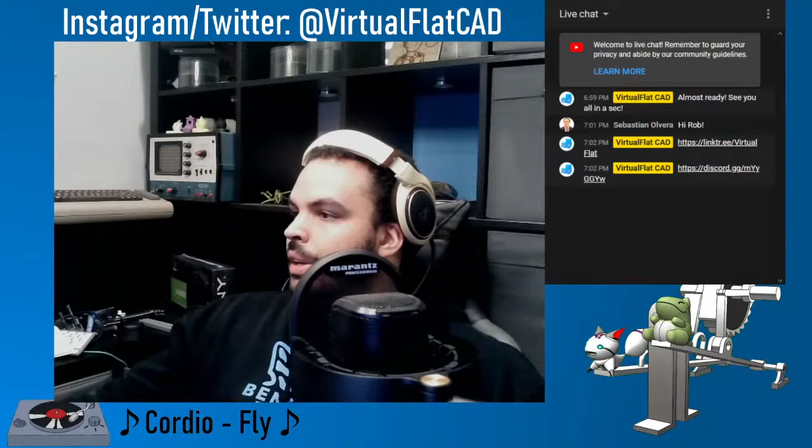But yeah, a couple stuff been going on there. Let's check out what we've got. So, oh yeah, let's change this over to the main thing. Doing pretty good, and maybe push that up like that. And it's looking pretty good. I can actually grab this thing. There we go. Now we're cooking with gas.

So, yep, this is my Discord server. We can see we have quite a few people now, which is totally awesome. Yaya's been waiting for this for a while. Well, I don't think he waited for this specifically, but he's been awake for 33 hours and is excited to join us in the stream. Now that's dedication. But in all seriousness, man, you should get some rest. It's not a big deal if you miss out on my stream. This is always recorded. And I think the thing I'm going to do from now on is just post the entire stream as soon as it's finished, pretty much. I did that last time, and I think it worked pretty well.

And yeah, Virus is also excited for the live stream, and he's excited to be picking up skills from my live streams to help him with the 3D design challenge, where you're supposed to take some of Da Vinci's drawings and render them in 3D. And apparently Dassault Systems is running that contest. We might dip our toes in there too. I might try something out, but I do this for fun, and the fact that you guys are hanging out with me right now is enough incentive to do models like this.

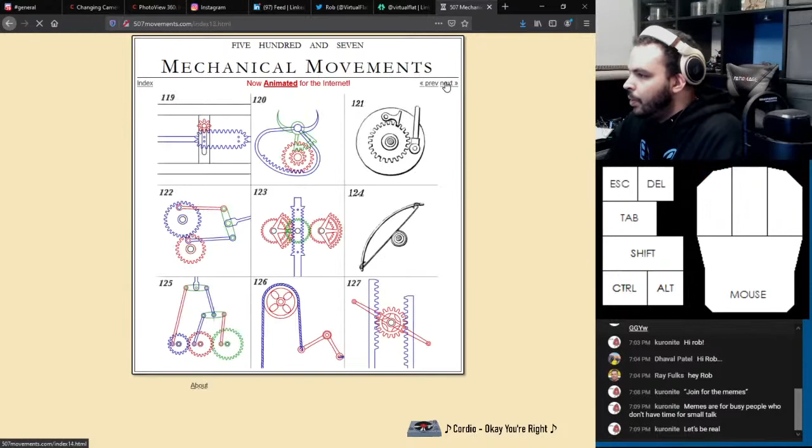This one's interesting. I have to keep taking a look at it. I think we can find something interesting. What is this? Steam Engine Governor. Now that's an awesome name. Operation is as follows: on engine starting the spindle revolves, carries round the crosshead, to which fans are attached. Interesting.

Oh, so these are kind of like how music boxes actually have similar governors that work on a similar principle. I don't know if you've ever seen a wind-up music box, but if you look really closely, they have a component that looks like a little fan that rotates around. What that fan does is it basically catches the air, and the air resistance is what slows down the mechanism. If it wasn't for that governor, you'd wind up a music box and it would just play a flurry of notes in like 3 seconds and be done. So

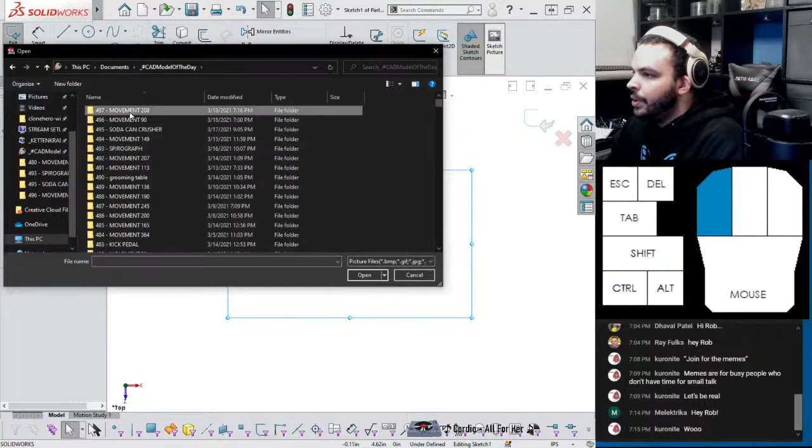Yeah, I don't know why I didn't have SolidWorks started up, but let's do that. At least we get to watch my custom splash screen. Alright, so part. And let's start on the top plane. Grab the sketch picture. Put that in the middle the best we can. Stretch that doodad and make it 12 inches. We'll make that 1 foot across. That's totally fine.

Oh, you know what I found out that's pretty cool? I accidentally stumbled onto this feature. If you right-click a sketch, you can actually say make reference sketch, which is awesome because you don't, well, maybe I just blew up my theory. Where's the origin? I was about to say you can't mess it up, but I just did. So I guess that only applies to sketch entities. Okay, yeah, I goofed it up. Turns out I gotta do a little bit more testing on it.

But apparently, if you want to draw like a layout sketch, and you know you're not gonna edit it again, you can right-click and say make reference sketch, and that'll prevent most accidents, I guess we should say.

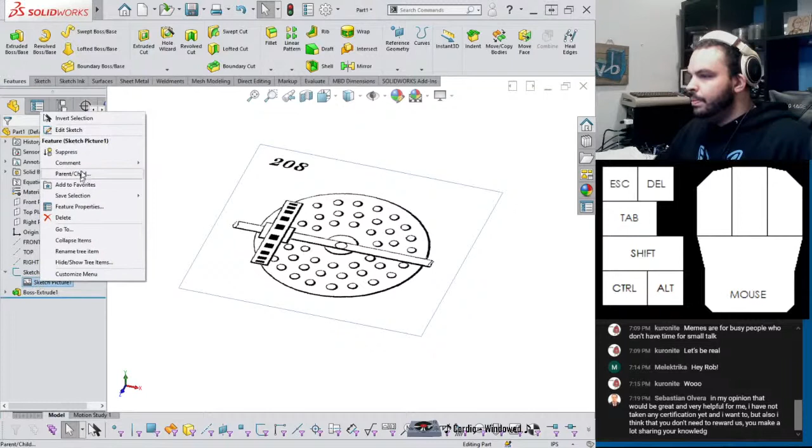So yeah, actually, let me see if I can. Wait, now you're not gonna let me edit it? Okay, there we go. I want a little bit of transparency, so I'll say full image, 60%. So you can actually make the sketch pictures transparent, but apparently that does not make them intangible. So I'd like to click the top. Well, I guess I can click top plane.

Okay, this is going to be very interesting. So how many instances do we even have? So 1, 2, 3, 5, 6, 7, 8, 9, 10, 11, 12, 13, 15, 16, 17, 18, 19, 20, 21. I'm actually going to guess 20 because the pegs are obscured here. I don't know how many there are. But just to kind of round it off, I'll try 20 and see how that looks. Let's get rid of all those points. I'll just start with 1.

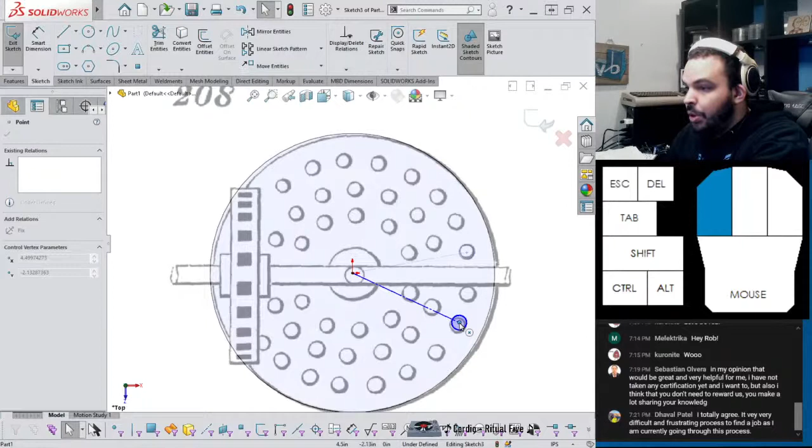Dhaval saying, I totally agree, it is a very, very difficult and frustrating process to find a job, as I'm currently going through the process. Yeah, hang in there, brother. I've been there too, and it can be very difficult, especially that a lot of recruiters and hiring agencies are not respectful of your time as an applicant. It really stinks to see that you spend all this time applying, writing cover letters and stuff like that.

If you don't think I'm the right guy for the job, fine, but just sending a message that I didn't get the job, I think that should be the basic bar. Even if that's done by a robot or an automated email, it is still kind of insulting, but I'd take that over nothing. Don't leave me wondering. But yeah, I definitely think it's broken, but I'm not really sure how to solve that problem.

So we'll do something like this.

It looks like kuronite is in the same boat. Yep, hang in there. I'd like to think that I'm putting together some good lessons for you. So hopefully you'll be able to prove your skills when the time comes.

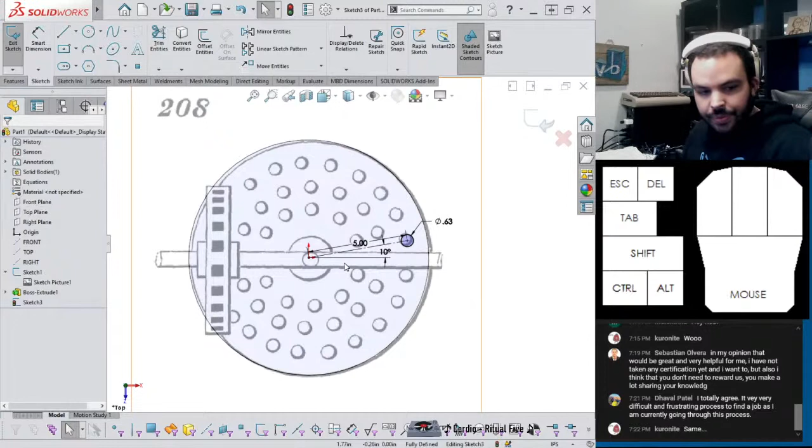I will tell you guys a funny story though. This was when I was graduating school, in the same boat as all of you guys. I was very frustrated with the job application process, and I was just sending a whole bunch of resumes out. I shotgun spread my resume anywhere that it would fit, pretty much. And I applied to this one company whose main CAD program was Autodesk Inventor.

But they still decided to give me a call and have me come in and talk to some of the guys, even though at that time I was a certified expert. It's like, okay, let's check this guy out. I talked to the hiring manager, we get along well. We talked to a VP of the company, we get along well. And then I talked to the head engineer. He was like, okay, we're gonna give you a proficiency test for CAD. I'm like, great. I'm primarily a SolidWorks user, but how different could it be?

He gave me a little assignment where there was an assembly with a table with a square top with 4 legs, and he had this foot in a part file. It's like, okay, put these feet on these legs. And before I even touched a mouse, I asked, so what's the design intent with the foot? Are we centering it? And he looked at me like I was speaking some alien language. Just put the foot on there. I'm like, but I need to know how you want me to put it. What are the expected design changes?

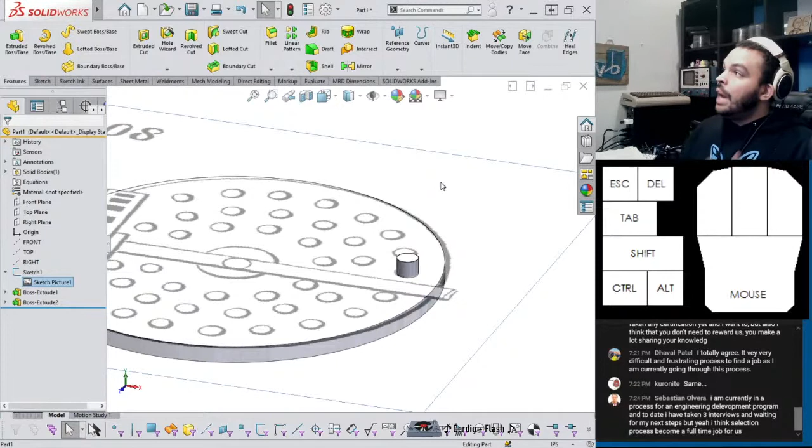It's like a red flag where I'm bringing up what I think is a valid concern with how this thing's being put together, and you just kind of brush it off. You don't want to work with someone like that anyway. But I was a little annoyed by it, because he kind of showed me like I've never seen a computer before. And then after that, I talked to the hiring manager again. We parted ways, and they never gave me a call again. And that was that. So yeah, I've been in the same boat too.

Yeah, Sebastian saying, I am currently in a process for an engineering development program, and to date, I've taken 3 interviews and am waiting for my next step. But I think the selection process has become a full-time job for us. Absolutely. Applying for jobs is just brutal in general, because do you spend a lot of time on few applications to maximize your chances, or do you just shotgun, shoot your shot, spread it as wide as possible? And I can't give you an answer to which is better or worse.

I've done it both ways, where for certain jobs, I will take my resume and curate it. So, for example, if someone will say something like, CAD experience required, video editing skills a plus, then I will reshuffle my skills to say SolidWorks, then Adobe Premiere Pro, then Camtasia. And maybe another one is like, we'd like engineering drawing skills and CAD work. So then I'll put SolidWorks, and then some kind of related experience, like I've done patent drawings before. I'm sure you want me now. So I've done that too.

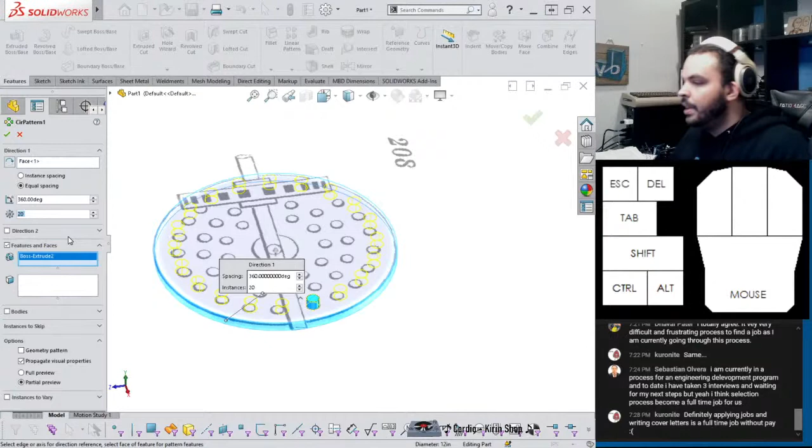And yeah, I don't know if any of it makes any reasonable difference. I'd say do what feels right. If your resume is really generic and boilerplate, you might want to sprinkle in a few details that differentiate you from the rest of the pack. But I wouldn't go too crazy with it either. kuronite saying, definitely applying to jobs and writing cover letters is a full-time job without any pay. Yeah, that's the important bit. There's no pay. Mad stinky, I tell you.

Man, I don't know how many instances to put on this thing. Here, I'll leave it at 20. I'll stop messing with it.

But I believe in you guys. Hang in there. Especially with the current world events, every economy ever has contracted. It's just brutal. Now, I do consider myself to be very, very fortunate to have a full-time job right now to keep all the good stuff going. Eventually I think I would like to move full-time into YouTube and streaming and stuff like that, but I'm a long ways away from that. For now, this is just something that I do because I like it.

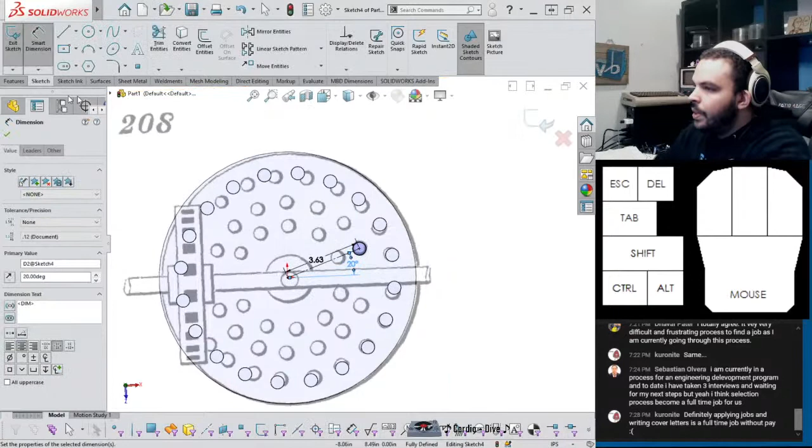Actually, I might. If I double click this, yeah, this will change this up to surface. So that way I can have this one feature control all the peg heights, and I think that will be very helpful because I don't even know how this thing's gonna run. It'll probably run like garbage, to be honest, but I'm here for it. Looks pretty good for that. And actually, what I should be keeping track of: it started with 5, went down to 3 5/8. So that's a 1 3/8 subtraction every time, pretty much.

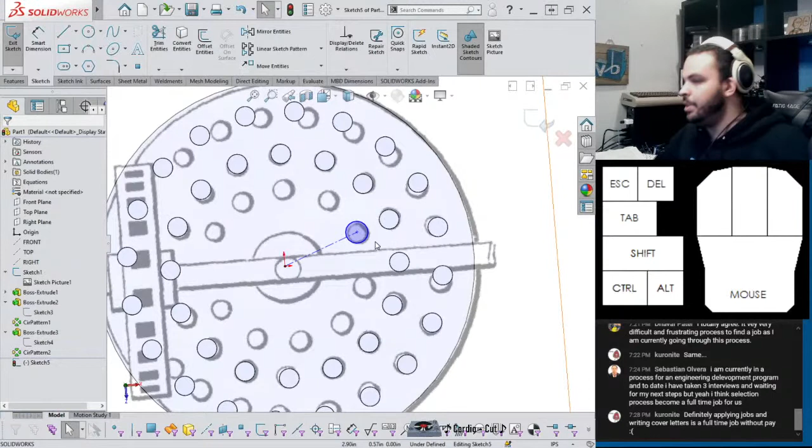And something that I probably should be doing too, like I did in my last 12-hour stream when I hit 2,000 subscribers, which felt like a long time ago but really wasn't. It's crazy that I'm almost at 3. I kind of stopped focusing on the task at hand and started checking out people's work. Maybe I'll do that again, where I show off people's work in the Discord. There's a guy, EMW Designs, who said he was using my impressions of his animations during the 12-hour stream to say, look, this guy knows what he's talking about, and he said my work's good. And I'm cool with that. I'm here to back up my homies.

3.625 minus 1.375. Okay, so it's gonna be a little bit different than the sketch, but I think the sketch is done pretty freehand, it would seem.

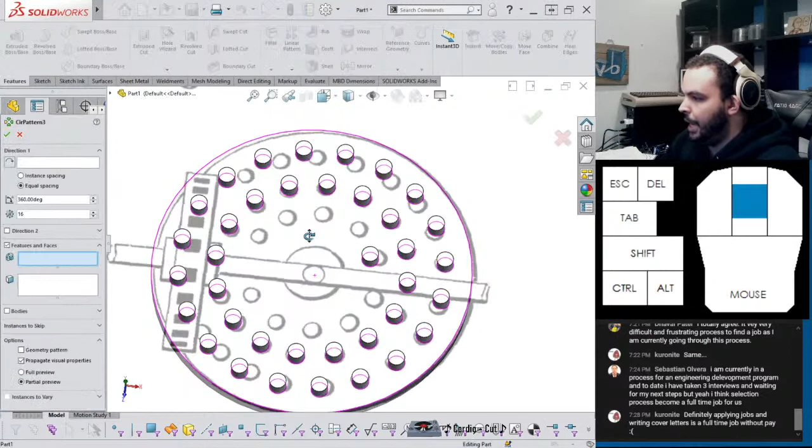So yeah, I'll be taking liberties and kind of squaring things up. Yeah, 16, sure. Why not? Probably should get it saved. You know, that's always a good call. Movement 208.

Bruh, I really don't. The more I think about this, the more I realize that this thing is gonna be hot garbage. You know, but maybe I'll be wrong. I put this thing together and animate it, and something amazing happens.

The lines you have in your operations tree, front, top, and right are axes? Yes, they are. So here, I'll take a little detour. So I set up my part template such that not only are the 3 main planes present, but I have these 3 axes, and that makes it very convenient for stuff like that.

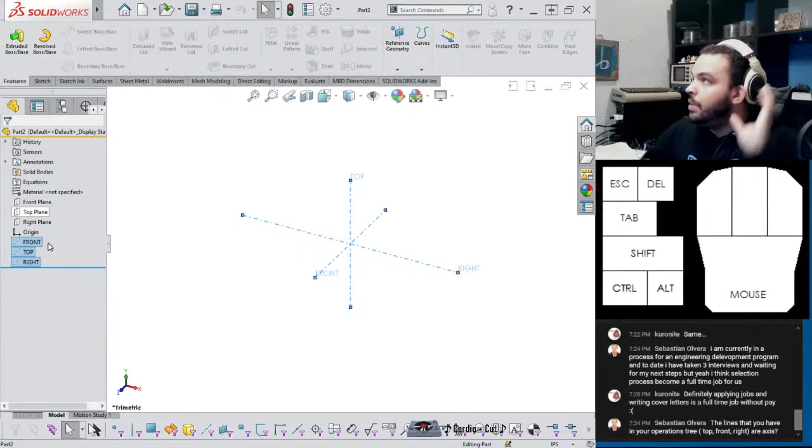And that's something that I hear from people who are transitioning from Creo to SolidWorks, for example. Apparently Creo files will have the axes by default, and then they grumble and they say, but SolidWorks doesn't have it. I'm like, yeah, I guess, but it's really easy to set up. So you know what you would do. Let me see if I can get like a tutorial document. Yeah, so for example, here's a part template that does not have it.

So the way I did it is you can select, for example, the front and the top plane together, and the intersection of these planes will make an axis. So you can go and click your axis and then click that. And the way I name this, I think in Creo they will call this the axis that it is parallel to, so they would call this the x-axis or something like that.

That's fine, but what I like to do is name it after the plane it comes directly out of. So if you notice the right plane and this axis, the axis is perpendicular to the right plane. So I would name this right. That might sound weird to you, but it is strangely intuitive to me. And I think that really matters.

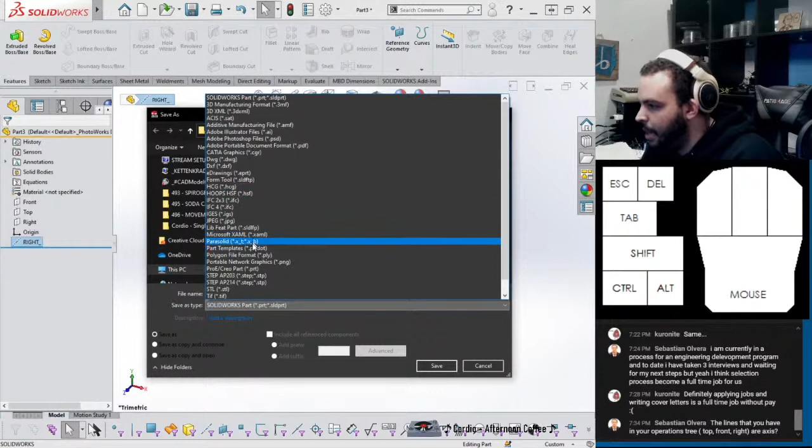And I guess it's looking at my other files, right? Save it like that. So I would name that right. So this is the axis that comes out of the right plane perpendicularly. But yeah, you can name that whatever you want. And then when you're done with that, you'll go save as, be something here for template. It's probably here somewhere. Bruh, where is template? A part template. Here we go. I would expect SolidWorks part template.

And actually, I think I may have goofed this up, and not in the way you're thinking. So another story time. When I was at SolidWorks World for I believe 2019, the year preceding the rearrangement of these file extensions, what it used to be is you would hit save as type, and all these would just kind of be random. My guess was it's just order of implementation when they developed SolidWorks. Like, oh, this is a new file format, and it just was at the bottom. And SolidWorks, rightly so, said, this is a little bit confusing. How about we alphabetize them?

And so in one of the alphas I did, they showed me a version of SolidWorks where everything was alphabetized. And I mean strictly alphabetized. That means if you wanted to save as a SolidWorks part, because you're in SolidWorks after all, you would actually have to go through the middle of the list. It would be right next to step file, pretty much. And I looked at that and I'm like, I don't think that's very convenient. I think you should put SolidWorks stuff on the very top and then go alphabetically. Far be it for me to say, but I think my comment went through.

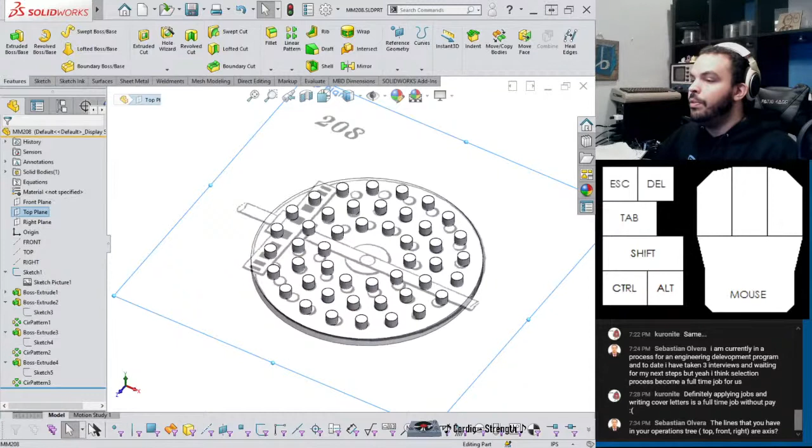But yeah, as you can see, it comes pretty handy. And because the axes are dependent on planes which can neither be destroyed nor modified, they are perfectly robust. You can delete the axes themselves, but there will never be an error where this will have a warning triangle that says, hey, one of your planes is missing. That's impossible, because I used the actual planes themselves to define it, so I would recommend doing it in that way.

Time to do the wheel now. And here's where things are gonna get screwed. I need to make this wheel such that it will accept spacing from each of these, I guess, rings, these rows. Oh my god, this is such a weird idea.

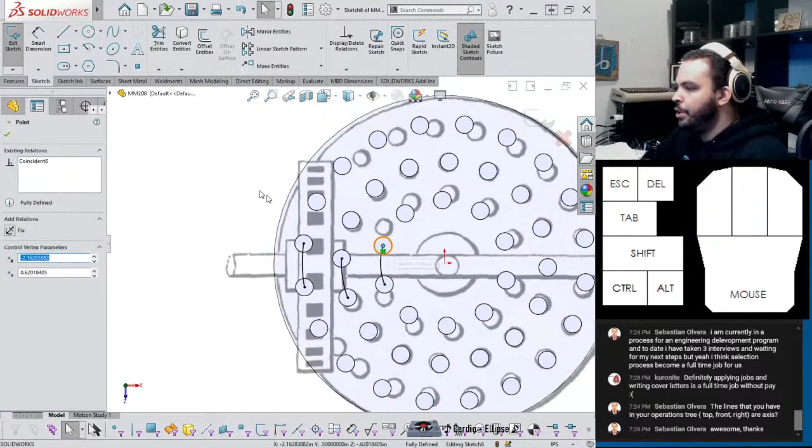Can you give me the midpoint, please? No? Cool. Okay, there we go. Alright, so, drew that. I love it when it flips the other way like that. So that distance, and then... So all these three distances need to be approximately the same. If there's a little bit of slop in there, I might be able to make these square holes wider to accommodate them.

But let's see. I get smart dimension and then select the endpoint, and then the arc itself. I should get arc length. That's how you get arc lengths. And the red is not an error. Actually, let me just change that right now. I did it for a project one time and just never bothered to change it back. I think it's these. If I go to color scheme and then dimensions driven, change that back to gray.

Okay, now they're not that noticeable, but I'll just drag them out here. It'll be fine. So you can see 1.42 to 1.41. So these two arcs are approximately the same. This one is a little too wide, so maybe I'll add an extra instance. So this is that first pattern. So back to 21 that I originally counted. Let's go back to the sketch. So 1.5, maybe add an extra one, honestly.

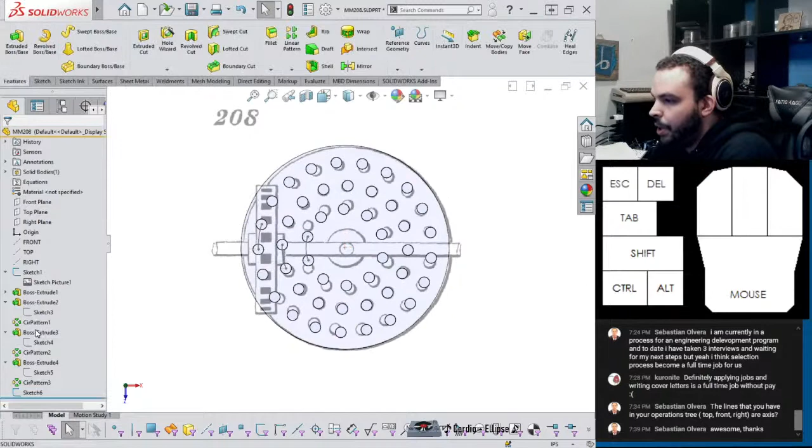Rebuild. Go back to the sketch. And that's actually, I think, right on the money, because now we have 1.41 to 1.42 to 1.43. So, 1.42, plus or minus 1/100th of an inch. I don't think we're going to get any better than that, honestly. Not unless I do some kind of driven sketch, but whatever. We'll just see how this goes. I'm not trying to go too crazy, but also give this thing the best chance it has to actually work.

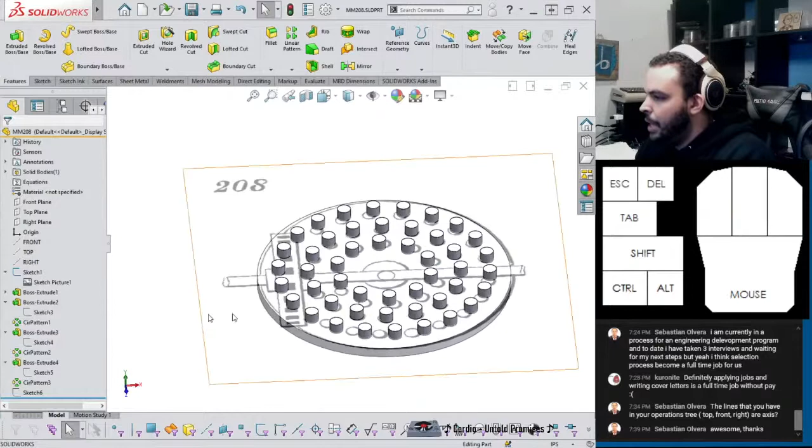Alright, so let's make this disc. And I think I'll accomplish that by sketching on the front plane, and I'm going to do it as a revolve. We'll just do something like that, maybe. Homie, can I get that midpoint? Well, actually, shoot. If I can get this centered where I need it to be, I can actually just move it in the assembly. But in order to do that, I think I'm going to borrow this helper sketch that I was using from before.

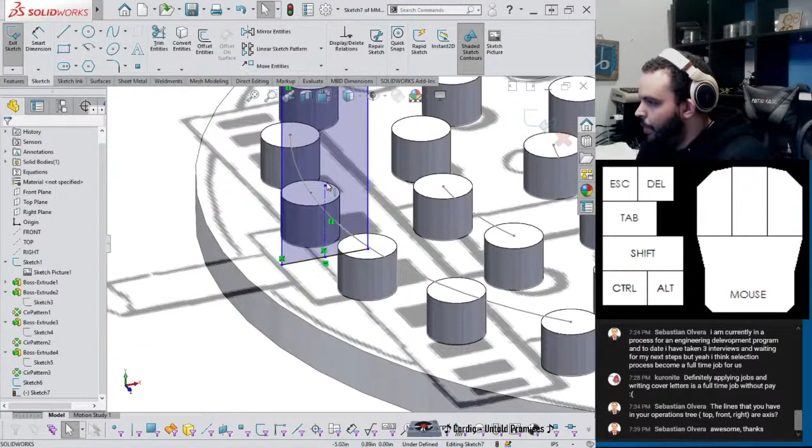So I'm just going to extend this out like this. I don't need its dimension, but I do need its presence. So now you see we have this thing going through here. Grab a center line, snap that to the midpoint, make that vertical. Actually, where's my sketch relations? There we go. So midpoint, vertical, and then this point and this path should be pierced. And that should move it exactly right in the center of where this would be if this was rotated just a little bit more.

A clean 1 inch, why not? And I'm probably gonna have to test around with this value, honestly. And then I can just go ahead with a revolve, like this. And I'll avoid merging the result. Immediately we have a problem here, because that's not gonna fly. Just gonna have to make it a bit smaller, I think. It's still... oh my god, I don't think this is gonna go well, at all.

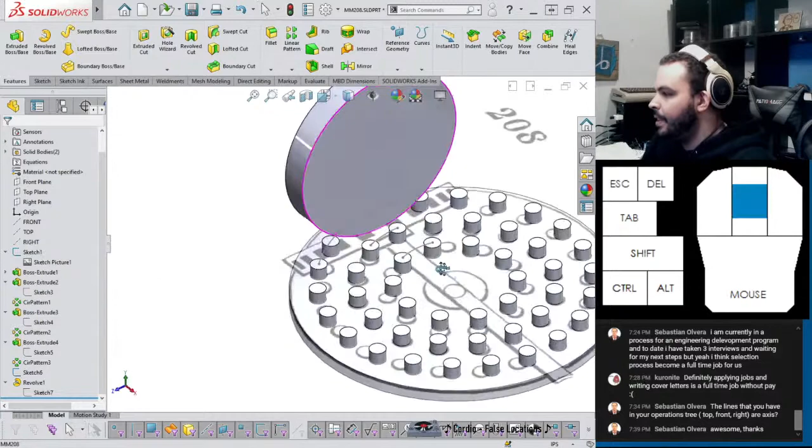Honestly? This can sort of work, but not as pictured. So this has sort of discrete holes with a wall here. I don't see that working at all, especially because this is coming in at a curve. And there's no way it's really gonna line up in there, even if the holes were oversized. They would have to be way oversized, or that, I guess I'm gonna call it a pinion, would have to be very small, or the main wheel would have to be very large so that they approximately come in at a straight line.

But there's another solution here that I'm thinking of, and I think of honestly just knocking out this wall entirely. That way, it's honestly like a tooth of a gear.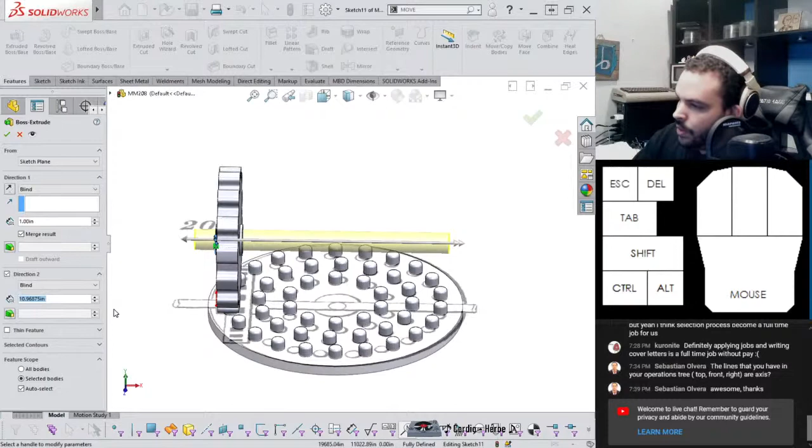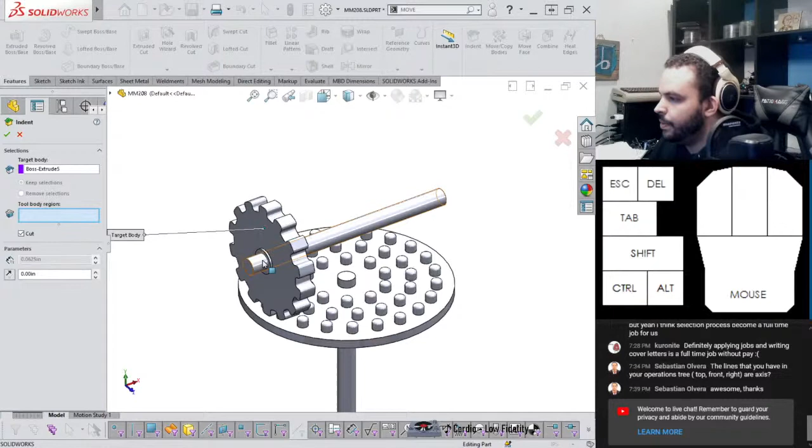Yeah, I was trying to merge the whole thing together for some reason. Well, actually, I changed my mind about merging this. So let's uncheck merge. But also we still have to make the hole, so I'll do that with indent. But yeah, I think I'll keep this in place. Alright, I think it's time to put this into an assembly and start trying to animate this madness. Bodies. Actually, if I'm gonna leave this here, I'd want that, you know, fixed. Yeah, so let me do a bit.

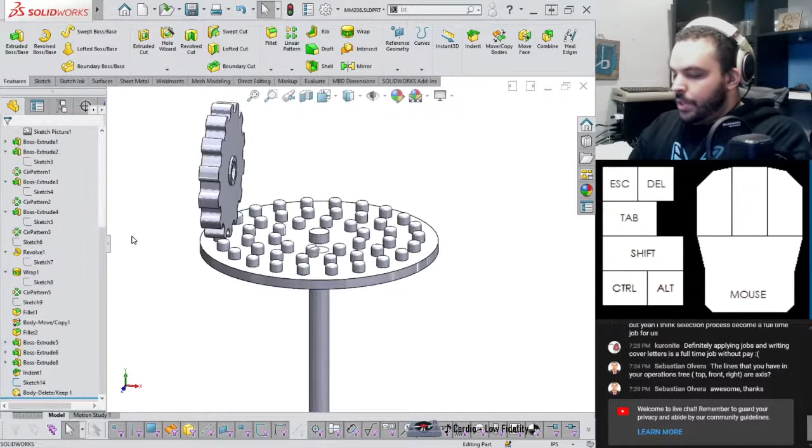I want to leave it in the part file, so a cool way of doing that is you can get your delete/keep body command. This will delete bodies, but not the features. This is just to get rid of the body. All the features that create it will still be there, so I can just turn that off and get it back. Now save bodies. Consume cut, sure. And then MM208 ASM. Okay, so now we should have this part file, but if I turn this off, it's all back. Look at that. Wow. Isn't that amazing? Okay, now we can just put this in here.

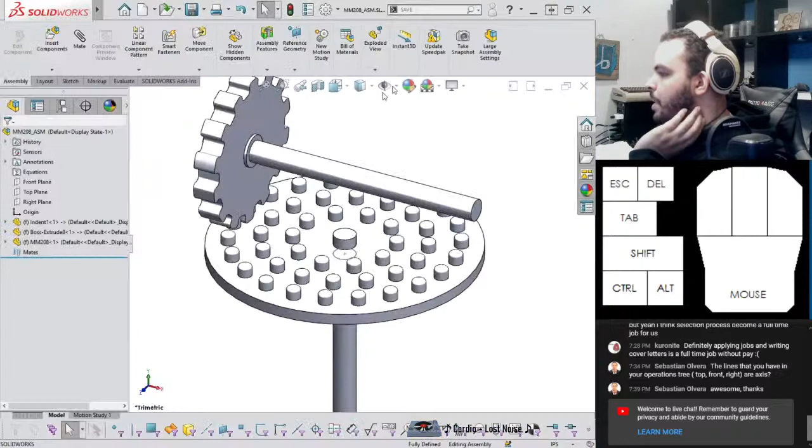Now, I wonder what drives what? Does the article specify anything? Or vice versa. You could do either. You can drive the cog and spin the plate in different directions, at different speeds, or you can spin the plate and drive the cog at different speeds. What would be easiest to see? I think I'm gonna drive the plate as the input, and then this as the output, and then I could even produce a chart too, just to see the speed changing. But before I get to that, I do need to float all of these guys and start putting things together.

Alright guys, we're done putting things together. Was it quicker than you expected? So let's test. So that should be able to spin. Great. So this should be able to spin and slide along. And indeed it is able to do that. Save, and then the real fun begins.

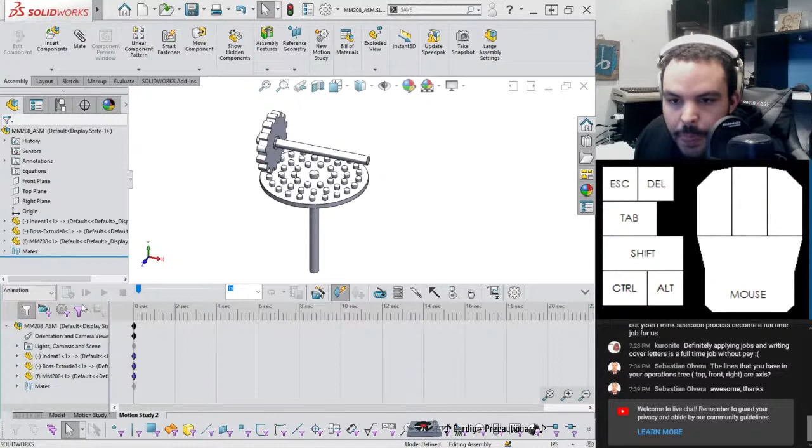Music's going nuts. Turn that down. Okay. There we go.

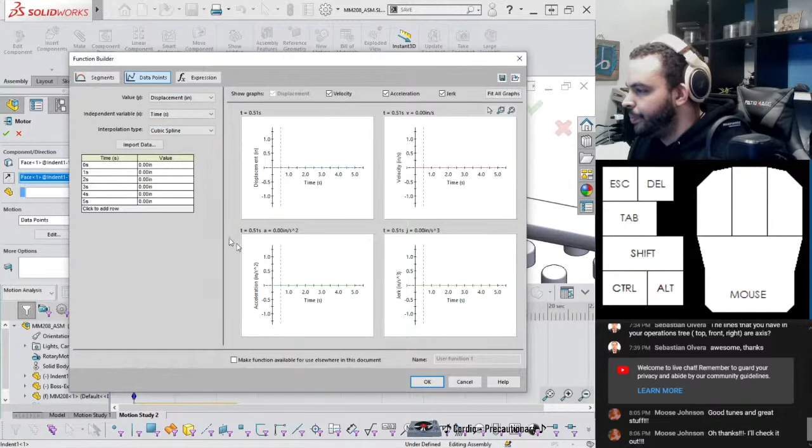Yeah, we'll just give it a bunch of zeros, because first I want to test if there's a motor on this, will it fully stop this in place. Okay, so that is doing what we want, because I know when you put a motor and specify 0, that's basically the same as locking it in place with a mate or something like that. But I'll also use that linear motor to actually engage the different drive modes, which I'm sure will be fun.

I'll probably make this whole animation 15 seconds long, so I'll drag that all the way out like that. And back to linear motor. So I'm just going to put zeros all the way to 15. So it was 1.375 or 1.38. That's cool.

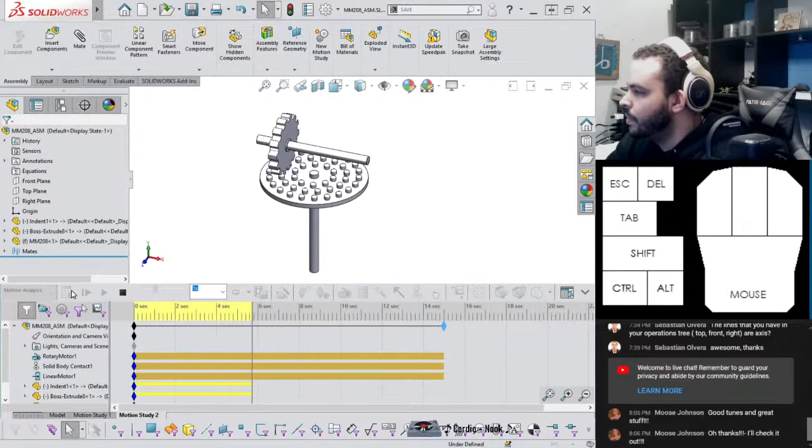So the Akima spline should give it a more gentle transition. So it looks like it's starting over 1 second. So let's try that. So it'll move forward and then it'll move back. But this is just for proof of concept. That is interesting. That wasn't as bad as I expected.

Will you check it out, Moose? Oh, thanks, man. I know he'll appreciate it. He loves when people check out his music, so, you know, I'll appreciate that too.

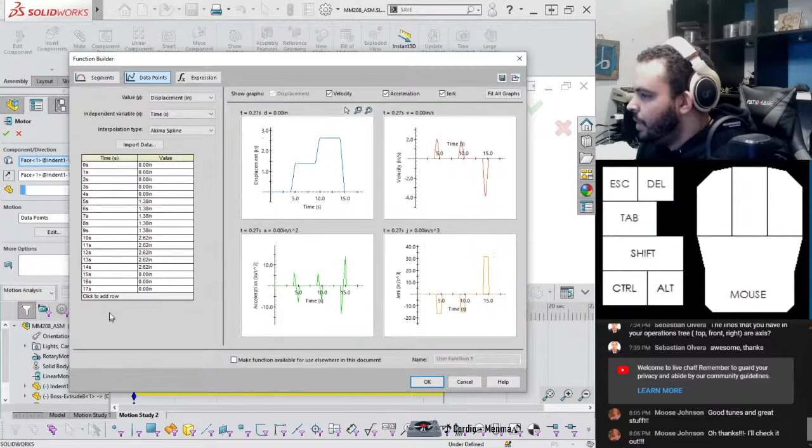And actually, the amount of times I say "and actually," yeah, I'll add some extra zeros to make the Akima spline behave a little better.

I think that works. Oh my god, this has no right to be running as well as it is right now. I'm just trying to study. Like, it probably is clipping a few of those pegs. I wouldn't expect a setup like this to last very long. Oh yeah, it does startle the little cog. So you can't change it too fast now. Alright, so out of curiosity, let's get a velocity read on this thing.

Oh, looks like that typo got you again, Moose. No worries, I've been there.

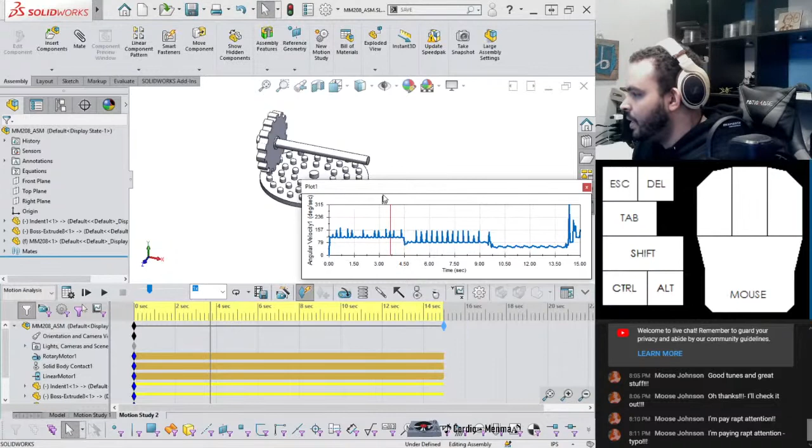Okay, so I need to find a place to put this. Why is it flashing?

Typos always happen. Yeah, they sure do.

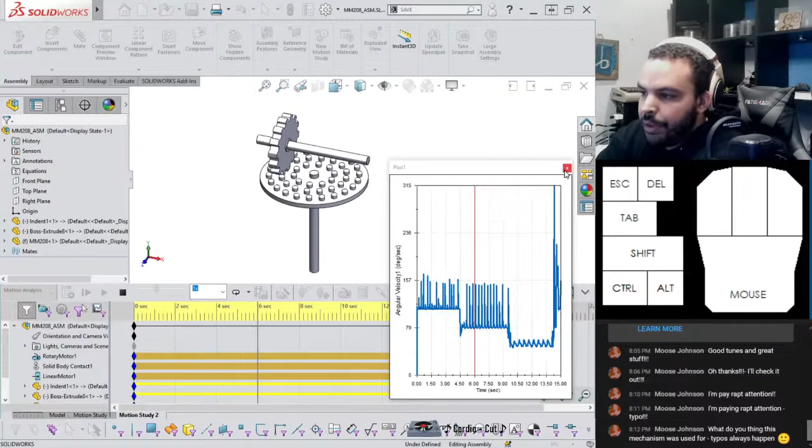What do you think this mechanism was used for? Honestly, it was probably used as an attempt to make a transmission of sorts. But of course, superseded by better and less noisy versions that wouldn't wear themselves out as quick probably took hold. And that would be really cool to do, like an actual full manual transmission. There's tons of documentation on it, like from an automobile.

But yeah, I think it's important to view mechanisms, especially like this one, through a historical lens, because the book this all comes from was made in 1870, where mechanical design was in its infancy. That's when steam engines started coming about, and people needed to know how to transfer the spinny power of a steam engine into other kinds of power. But yeah, I don't think it's particularly all that good. But it is interesting nonetheless. I animate it in greater detail.

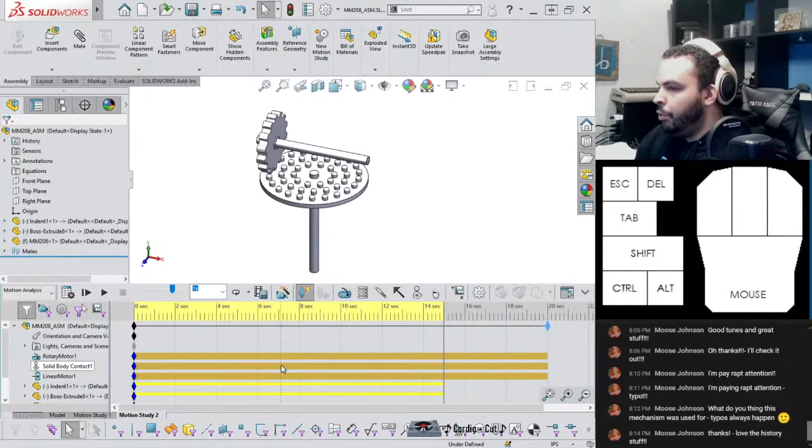What is very amazing is that practically every mechanism I've attempted to model from this book has worked in some way. It might not be the most efficient, quiet, longest lasting thing, but it does work in principle, which I think is really amazing, since in 1870 there was nothing close to CAD. So you gotta give the guy credit who compiled all of these together.

So Sebastian's saying, what is making the gear slow the speed between rings? Nothing. It just crashes into the little stud, and that slows it down, which I think would explain the very violent jumps in speed in the velocity diagram. Yeah, I assume there was something like a dog gear to slow the speed of the gear, to make it match that. It would be a lot smoother and a lot more viable too.

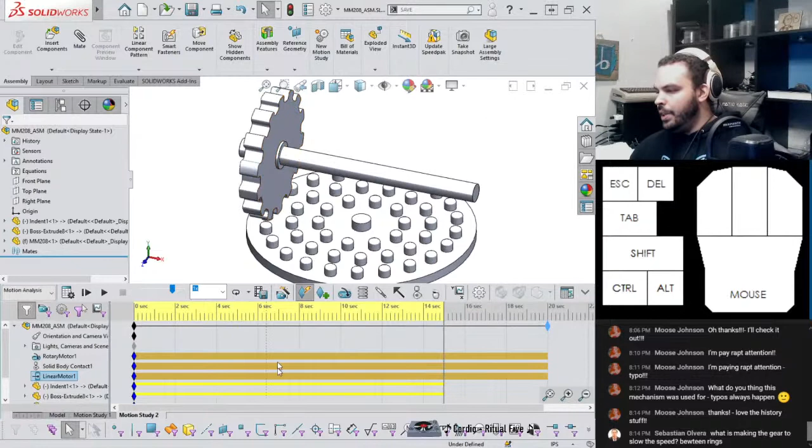But you know, I wouldn't depart too much from this original design. Like, I do take some liberties with it, give it its best chance without really departing from it. And I'd say this one actually would be the most, because there are walls drawn on this driven gear. If you look back at the drawing, they're just holes. They're blind holes, not open channels like I have them. So that makes it more enigmatic how this thing would work if I modeled it as drawn.

I'm not gonna worry about it too much though. This one's definitely been interesting though. Yeah, so I think instead of, you know, shocking it and going back to the first one so quickly. Can I copy these? That'd be nice. No. Okay. Guess I gotta do it the hard way.

Definitely one of my longer animations too. Typically I try and just make them loop every 5 seconds. Yeah, you can actually see it pause for like a moment as it caught the tooth. Yeah, I think I'll just leave that one as is.

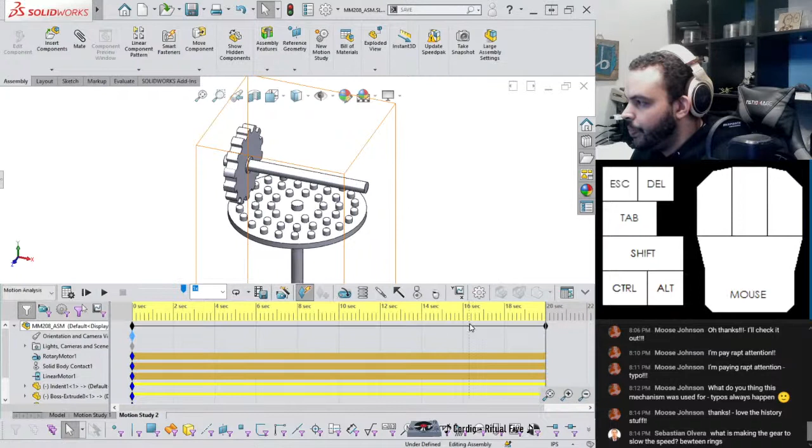Now, do I want to make these? Yeah, I think I'll just make this shaft like arbitrarily long. Want something from me or what? The way I did it shouldn't really affect much of anything. Let's give that a recalculate.

And honestly, the more I think about it, the more I think that this would be used like a transmission, but not to change while the machine is actually operable. Like maybe it would be a mode where you run the machine in one speed, but then you just turn it off, and then a technician would go and move the gear manually, mesh it, and then turn the machine back on again. Yeah, because I just don't see this thing lasting very long at all with sudden changes in speed. It is fun to watch though.

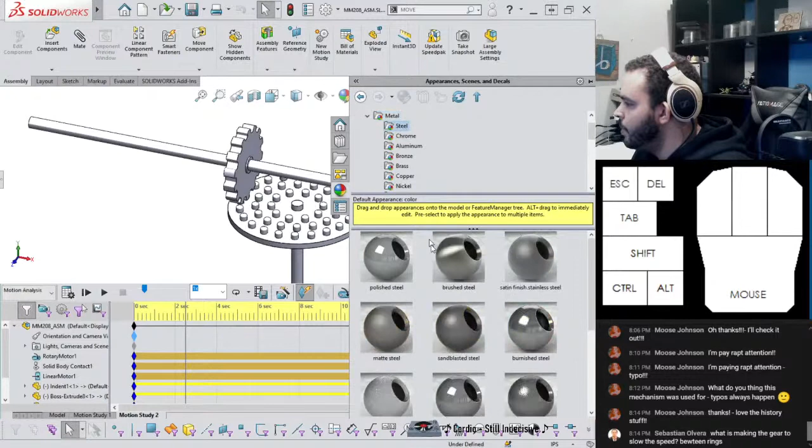Alright, I say let's save this bad boy out. Well, not before just putting that good old brushed appearance on it. Looks pretty good. Go. Wait for that to go.

And you know, I gotta find those memes that I've been meaning to post to the Discord. It's very important, paramount. Honestly, that's what fueled my college adventure. That's what kept me from just dropping. So I was fueled by memes, plain and simple. I might play a game a little bit after this. Today was a simpler day, I would say, but we're still getting a lot of good stuff done, learning a lot of cool things.

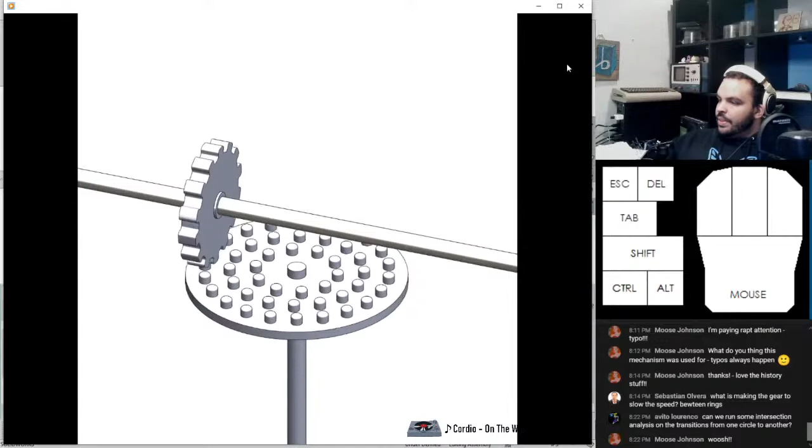Let's see, so we got this. Open with. Come on, my neurons can do it. Yeah, you see it stutter a little bit. And then it's not a perfect loop, but we'll leave it like that. Or maybe that was Windows Media Player stuttering. Oh, I guess it was, because it was smoother that time. It paused a little bit to reset. Alright, so I'm going to call that good. So we're done with that.

But I want to investigate Avito's idea here. Can we run some intersection analysis on the transitions? Absolutely. Well, the first thing to address is there is an interference detection tool which you can run for any particular assembly. Say calculate, and you see it's found some small intersections. So there's one right there where it's kind of poking into that space there. Same thing over there, and maybe a little bit over here.

So you're always going to get a little bit, even if you have two nicely meshed spur gears, because I think it's part of the algorithm of how SolidWorks motion with solid body contact works. I think it's based off of overlap. So when it overlaps a certain amount, it tries to push it away. But this isn't exactly Avito's question, right? He's saying, what about the transitions?

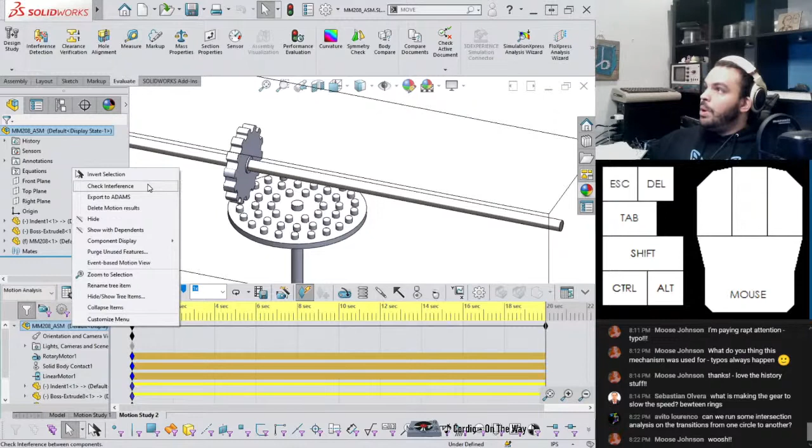This check interference is for motion studies specifically. So we'll run that, and nothing happened. So I'm gonna see if the window has appeared. Oh, it's right here, I think. Can we bring it? I don't know why it decided to spawn off of my screen.

But yeah, it's interference detection over time. So you have to select the parts to test. So I'm interested in this thing and this thing, and I can check by frame where the intersections are. So fine, now it's going to be running, so we'll just let it go. Yeah, so we'll just let it do its thing. It's like going on every single frame and running that interference detection.

Mind blown? Yeah, not a lot of people know about this, man.

Well, you can see it's already starting to produce some results. It's already had one transition, so let me see if I can expand this window so you can see a bit more what it has to offer. And there it's made another transition, and I would expect... There you go. So it gives the volume of, I guess, the greatest intersection, or maybe total intersection. I'm not really sure about that.

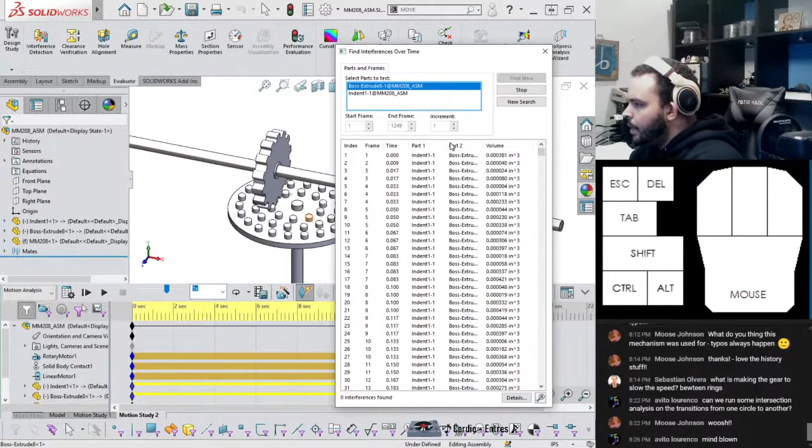I don't really need to know what part 1 and part 2 is, because there's only 2 of them. It's really the frame or the time and the amount of volume. So I think it's still working on it. So it's almost there. We'll let it go. Got it. Alright, it seems to have finished, so let's check out some results.

So, for example, on frame 3, there is this teensy-weensy tiny intersection. Oh, I see how it's doing it. So the index is the number of the intersection itself. But you see how on frame 3 there's 2 3s here? What it's saying is that on frame 3 there are 2 intersections, one with index number 3 and one with index number 4. One is really tiny, so I believe I can click on this and click this equals sign thing, and it'll zoom my camera to exactly where that is.

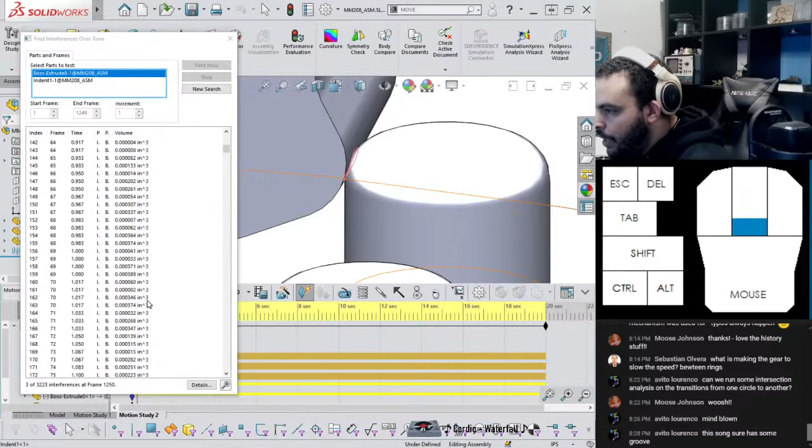And looks like that tiny, tiny little sliver there is the intersection it's talking about. The other one on this frame is a little bit larger, and it's that one. But then I can look through this list and see if there's any particularly huge interferences. Like that one's pretty big. So in frame 39, yeah, it looks like that tooth is really starting to clip that. Now, let's see if there's anything worse. So all of these are not bad.

But the transition happens between 4 and 5 seconds for the first one. So I would have to keep scrolling. So here is where I expect it to get a lot worse. So here's 4. 4.3. I'll get one that's in the 2/10,000s. This one's pretty big. Yeah, so there you go. So this is in the middle of its transition. It clips that tooth, and I think that would be a problem.

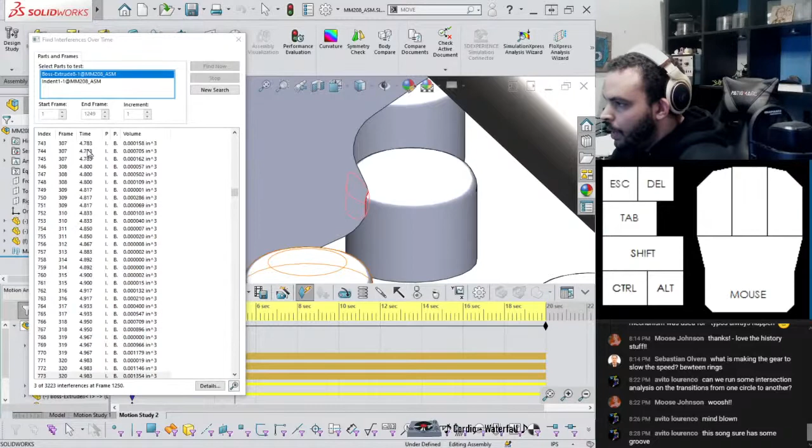So I would either have to have a more aggressive fillet, or even a fillet on the edge of the cog itself. Well, I'm not going to bother with that. Yeah, here's more. Here's it kind of crashing into this tooth. So it looks like in the third decimal place here, that's where the more serious ones are appearing, all between 4 and 5. Although I don't think that was particularly the worst transition. Visually, that transition is very smooth.

You know, I could even... let's get some reference footage again. I don't know why I ended up closing it down.

Sebastian, so if our mechanism would have 0 interferences, would it have nothing in the index column? Yes, that's what I would expect. Though the only mechanisms I run this with are those under motion analysis with solid body contact. So there's always just a little bit of interference, but it's deciding, is that numerical error? Sometimes it is that small, or it's just a numerical error of the solver, or is it an actual design flaw? And I think the key to that is by looking at volume and seeing how large the interferences are.

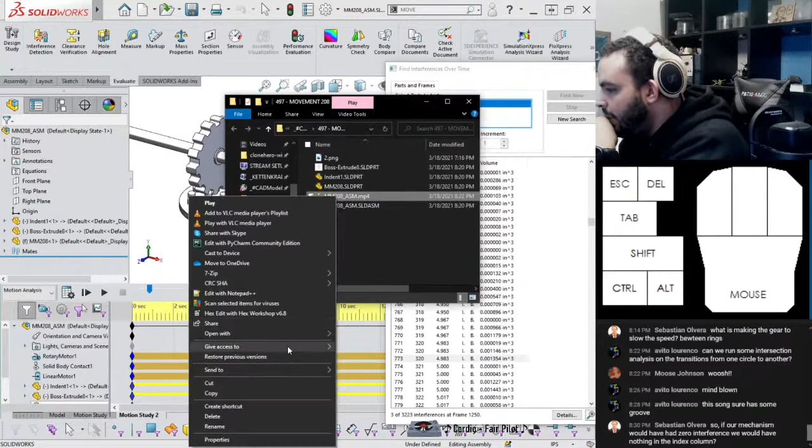Oh, I goofed up. We'll try again. I was not supposed to do that. Alright, so we have like 0.001. See, so that's a transition that we were inspecting. That's pretty smooth. You know, it did crash into some of the teeth. That one too. So there's one that I want to check out. It's that one. You see the cog kind of stutters a little bit. I'd like to look into that.

So there's the first transition. There's the second, which is visually fine. So the third one that happens at 14 seconds, I bet we'll get some fun stuff in there. So, move this back. Okay, so here's where 14 seconds starts. They're all to the 5th decimal place there. But I think it's about to get worse. So that one looks like it's pretty bad.

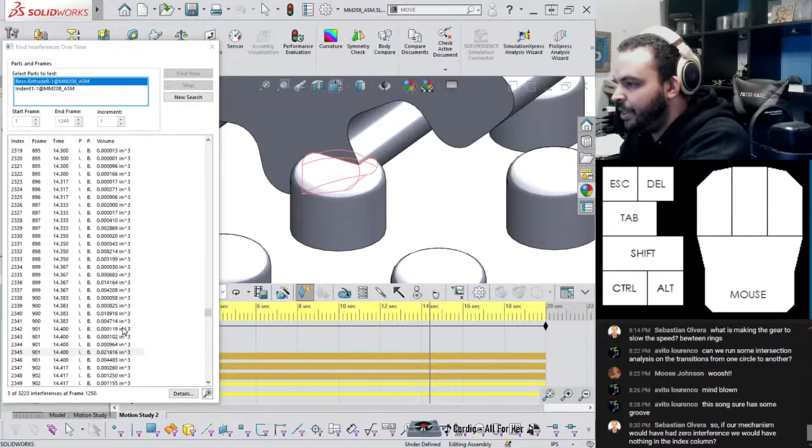Oh yeah, there we go. I think that's what probably causes it to stutter. Here's another big one. Yeah. Oh, here's a huge one. Oof. Big oof. Yeah, something's breaking at that point. That's a big F for that. Oh, what about this one? Yeah, also pretty bad. Yeah, I knew coming here would be the most interesting. Yep, another bad one to the 100th place. Keep going.

And then we're at 15, where all the rest of them should be pretty small. Like, here's a really tiny one. Yeah, look how tiny it is. I think you can save this out. Let me see. If I do details. Oh. So I guess it just gives interference details. Overall length. Oh, that's not too bad to know. That's pretty cool. I'm pretty sure there was a way to save this out, but I can't recall.

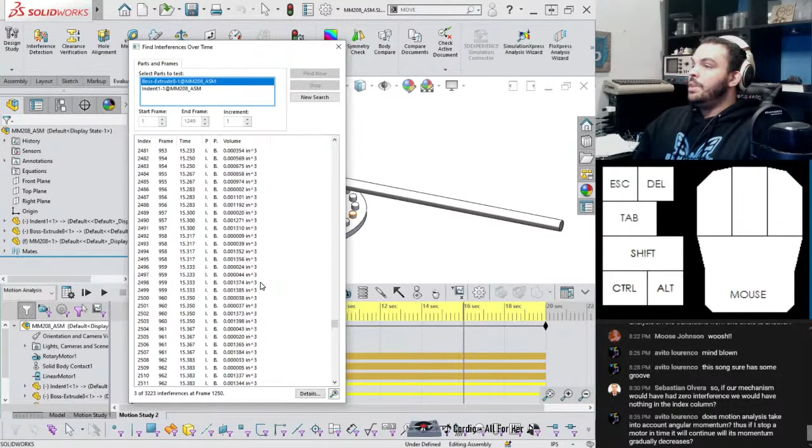Okay, I might have to look that up, but Avito asked a fantastic question and gave me an opportunity to show you a tool that was not very often used. Avito: does motion analysis take into account angular momentum? Thus, if I stop a motor in time, will it continue as its momentum gradually decreases? Yes, it does. Well, it can. Let's just put it that way. And it depends on what inputs you give it.

It is possible to make SOLIDWORKS motion do things that are physically impossible. And what do I mean by that? So, for example, I take this linear motor, which has me kind of stepping where the motor is. Stays here for a bit and then goes all the way here, then to the second one, and then back, right? And I define this motor in terms of displacement. But check out what happens when I change this to linear, right? So I have these situations where basically the changes in displacement are very sharp. It's infinitely sharp, in fact. And you'll see that when I run the motion study, SOLIDWORKS will have no problem with it.

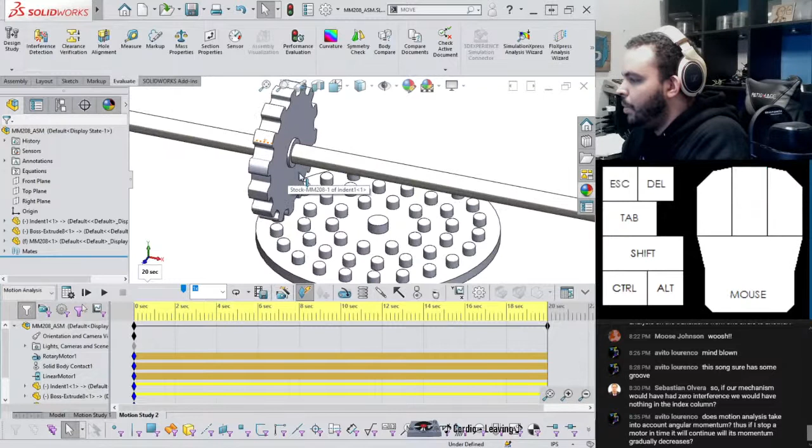And then it should start moving and then stop in infinitely small time. And those of you who know, to accelerate something to a constant velocity in 0 time takes infinite acceleration, which is basically impossible. It's mathematically impossible. So you would have to define your motors with other aspects, like for example with forces, torques. I believe you can actually put like horsepower through stuff. So if I say torque on this, you could actually put a certain amount of torque on a bar and then let it accelerate, taking into account its geometry with its angular momentum.

So yes, you would have to do it through force and torque rather than assigning it displacements and accelerations. Though you can get similar motion, I wouldn't be able to get, you know, if I put 1 horsepower through here, how much do I get out here? I can't do that with a study like this one. So I hope that answers your question. But yeah, Avito coming out here with the bangers. Great questions.

Yeah, this one was super fun. Yeah, and for all the fun that I make of it, I really do think this is impressive for the time. Want something from me or what? You know, the guys back then really had a strong understanding of geometry and kinematics to come up with something like this.

But yeah, if there's nothing else, I'll probably hang out a little bit longer. I'll probably play a game. I don't think I'll play Genshin tonight, maybe later, but I was thinking of playing Friday Night Funkin', which is a rhythm game, which I've been meaning to play, and I have it downloaded. So if you have any other SolidWorks questions, feel free to put them in the chat, and I can just tab back over and show you some more stuff.

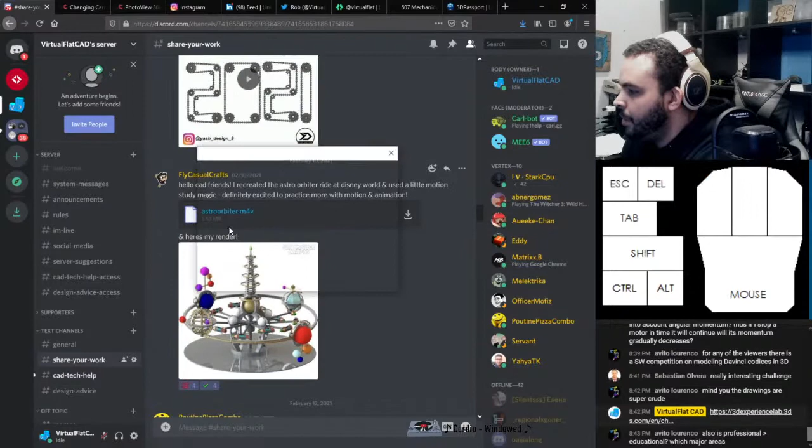But if you go, for example, to my Discord to share your work, there's something here. Oh yeah, Fly Casual Crafts, I believe. Yeah, so really the only difference is that your files get watermarked with a little grad cap. So by looking at this, I can tell she modeled this thing with Education Edition. So in terms of the design challenge, I'm sure that's not a consideration. They're not going to say, "Oh, this is amazing, but you modeled this with Education Edition." So you'll be in the races. You'll be good. Yeah. Fly Casual Crafts really did do an amazing job with that, by the way.

Yeah. What's my email? That's my email. What's my password? I don't know. This content doesn't exist, it said. Hello? Let me go back. Go back here. Come on. Okay, so I'm logged in.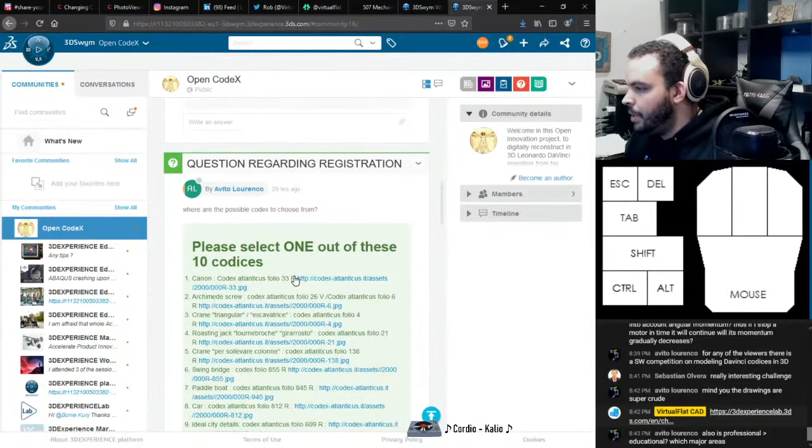Challenges, maybe? Open Codex community. Okay. Submission files. You have to make a post wherein you describe your project. Okay, please select one out of these 10 codices. Ooh, okay, let's just open all of these up. Rip my RAM. Oh my gosh, what is that? Bro.

So this seems to be a kind of defense weapon of sorts, for like a military build. I see a couple of dovetail joints there. So you're able to aim it, I assume. What are these projectiles? That's interesting. Okay, so it launches a sphere which apparently breaks open and has a bunch of party confetti. Real question is, why is Da Vinci launching hypercubes at presumably the poor sap who's over here? Okay, that's interesting.

Okay, so we have like this water screw. For transporting water. I assume that there's a screw that goes all the way through here. You drive this and can get water up into this trough.

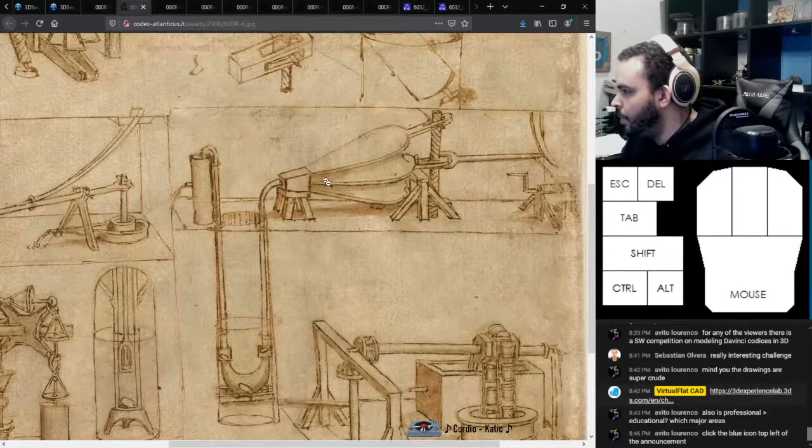So it looks like you have, of course, what would normally be a bevel gear, which is driving a whole bunch of solo cups down into a well and just bringing up the water and dumping it out here. It's kind of cool. So this is all having to do with water transport. This one.

A crane of sorts? Okay. Oh, this one looks cool. So we have what looks to be a fire. Is it? Or is that steam? Yeah, you were not kidding, Avito. These are rough to interpret. So it looks like this weight puts a constant tension on this rope, and so it's giving a constant driving force.

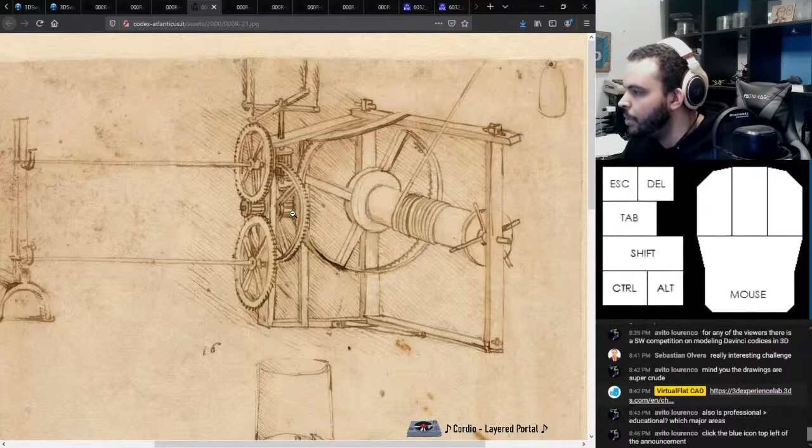Yeah, I would have to study these, honestly. Bruh, I think that's a little top heavy. Looks like he was doing calculations here too. You could see like a table kind of imprinted in there. Yeah, if you guys have any ideas, if you want me to enter and you want to see something in particular, this does seem like a bit of fun.

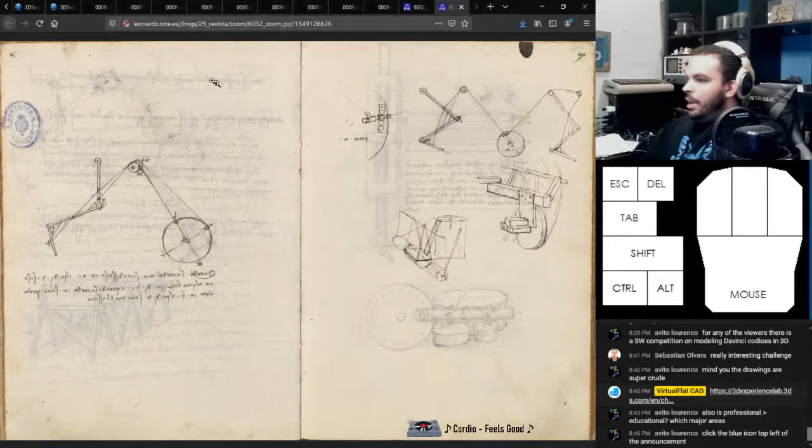Doesn't help that this one's sideways. This one's on the simpler side. And I think that's all the images. The bridge looks a little easy with some weldments. Oh, this thing? Yeah, I think a lot of these can have weldments involved, like this. You can use weldments to really optimize that. Oh yeah, this one. Yeah, that's really interesting.

Yeah, I'm just staring at these, bro. I think we can do one of them. And it's not about the winning, honestly. I think it'll be a good topic, and I'll probably run into many issues and come up with many solutions at the same time. So shoutouts to Avito for telling me to take a closer look at these. So you saw how you can get into it. You just need a 3D Experience account, which is free, and you'll be in there.